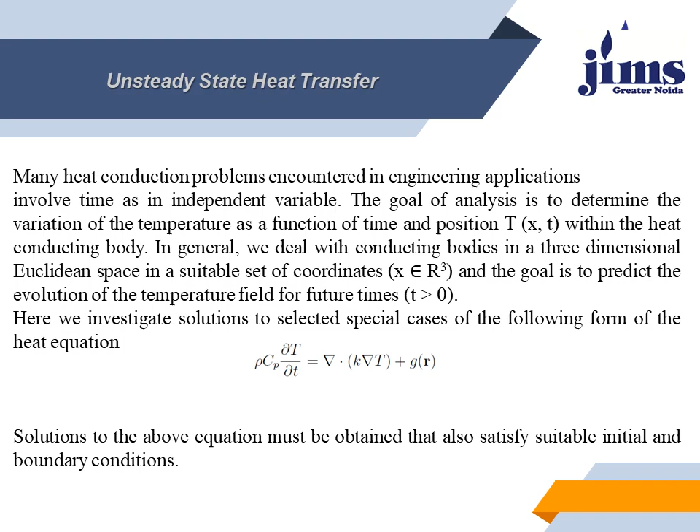Unsteady state heat transfer is generally used in different applications: IC engines, automobile engines, heating and cooling of metallic bodies, cooling and freezing of foods. These are the basic examples of unsteady state heat transfer. In unsteady state heat transfer, temperature varies with time, so time is a very important parameter. On the basis of unsteady state heat transfer we carry out the lumped analysis. So lumped analysis is a part of unsteady state heat transfer.

So what is lumped analysis? If the temperature of the body remains relatively constant with respect to distance, it can be treated as a lumped system, and heat transfer is a function of time only. Mathematically, the temperature is a function of time. So we can use certain dimensionless numbers, such as the Biot number and Fourier number. In lumped system analysis, the typical criterion is that the Biot number is always less than 0.1.

In heat transfer analysis some bodies are observed to behave like a lump, whose interior temperature remains essentially uniform at all times during a heat transfer process. The temperature of such bodies can be taken to be a function of time only, that is T is a function of t. Heat transfer analysis that utilizes this idealization is known as lumped system analysis, which provides great simplification in a certain class of heat transfer problems without much sacrifice of accuracy.

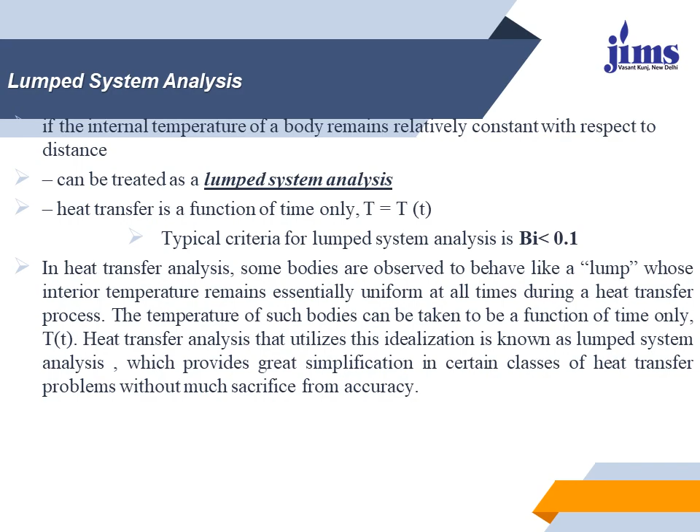In lumped analysis, we assume a copper ball, a plate, or a spherical ball. Consider a small hot copper ball coming out from an oven; measurement indicates that the temperature of the copper ball changes with time continuously, but it does not change much with position at any given time. Thus, the temperature of the ball remains nearly uniform at all times, and we can talk about the temperature of the ball with no reference to a specific location. In lumped analysis, we assume that the surface of the body is maintained at an equilibrium temperature.

All bodies have a finite thermal conductivity, and there will always be a temperature gradient inside the solid whenever heat is added or removed. However, for solids of large thermal conductivity with surface areas that are large in proportion to their volume, like plates and thin metallic wires, the internal conduction resistance, L/kA, can be assumed small or neglected in comparison with the convective heat transfer resistance. Typical examples are heat treatment of metals, or the time response of thermocouples and thermometers.

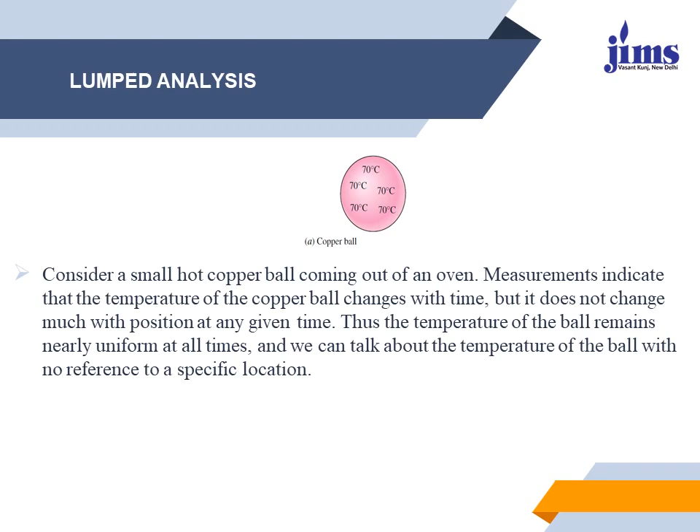Lumped analysis. So consider a body of arbitrary shape of mass m, volume V, surface area As, density rho, and specific heat Cp, initially at a uniform temperature Ti. At time equal to 0, the body is placed into a medium at a temperature which is maintained at T infinite, and heat transfer takes place between the body and its environment with a heat transfer coefficient h. So h is the heat transfer coefficient in case of convection.

For the sake of discussion, we assume the temperature T infinite is always greater than Ti, that is the initial temperature when time t is equal to 0. But the analysis is equally valid for the opposite case. We assume lumped system analysis to be applicable so that the temperature remains uniform within the body at all times and changes with time only. Mathematically, we can say T is a function of time.

During a differential time interval dt, the temperature of the body rises by the differential amount dT. An energy balance equation of the solid for a time interval dt can be expressed as h multiplied by As multiplied by (T infinite minus T) multiplied by dt is equal to m Cp dT, or we can say the transient response of the body can be determined by relating its rate of change of internal energy with convective exchange at the surface.

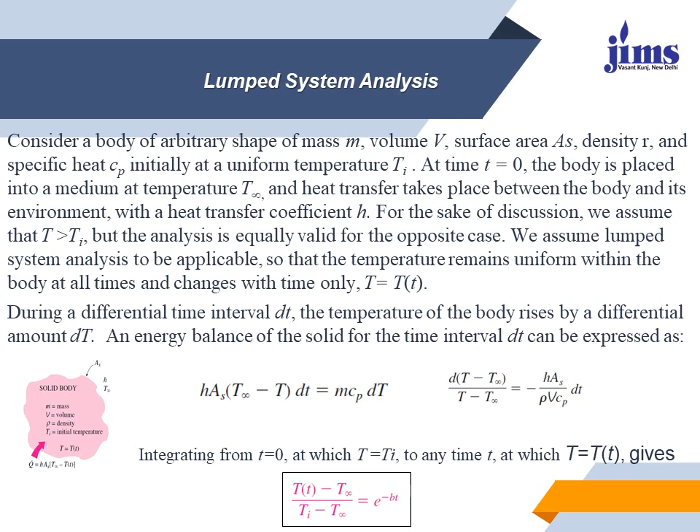This is a mathematical expression for the temperature distribution in case of lumped analysis, where T(t) is the instantaneous temperature at any point, T infinite is the temperature of the surroundings, and Ti is the temperature of the body when time t is equal to 0. So finally, the equation of lumped analysis is (T minus T infinite) divided by (Ti minus T infinite) is equal to e to the power minus Biot number times Fourier number.

The quantity rho V c divided by h As has the dimension of time and it is called the thermal time constant, denoted by tau th. Its value is indicative of the rate of response of a system to a sudden change in its environmental temperature. So from this diagram, the temperature of the body approaches the ambient temperature T infinite exponentially. The temperature of the body changes rapidly at the beginning but rather slowly later on.

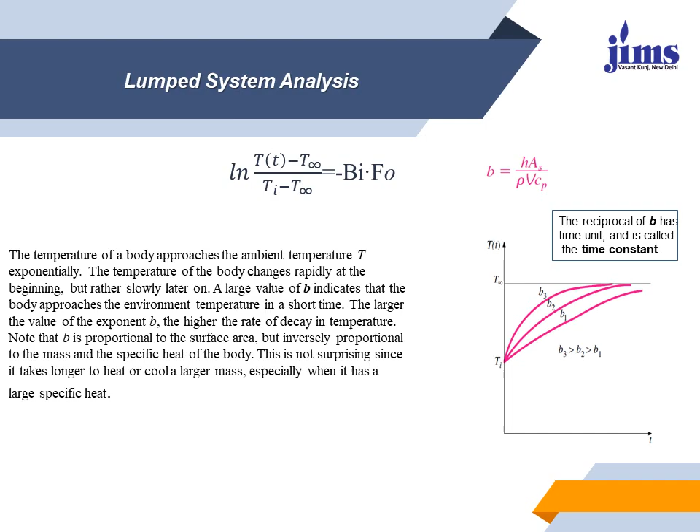A large value of b indicates that the body approaches the environment temperature in a short time; the larger the value of the exponent b, the higher the rate of decay in temperature. It is noted that b is proportional to the surface area but inversely proportional to the mass of the body and the specific heat of the body. This is not surprising since it takes longer to heat or cool a larger mass, specifically when it has a large specific heat. So from this figure it is clear that for a large value of b the temperature approaches T infinite exponentially.

So the Heisler chart. The Heisler chart is also very important in case of transient analysis. The solutions obtained for one-dimensional non-homogeneous problems with Neumann boundary conditions in the Cartesian coordinate system using the method of separation of variables have been collected and assembled in the form of transient temperature charts by Heisler. The given charts are a very useful baseline against which to validate one's own analytical or numerical computations.

Therefore, the Heisler chart provides the temperature history of the solid at its mid-plane, and the temperatures at other locations are worked out by multiplying the mid-plane temperature by correcting factors read from the charts. The values of Biot number, Bi, and Fourier number, Fo, used in the Heisler chart are evaluated on the basis of a characteristic parameter, which is the semi-thickness in case of a plate and the surface radius in case of cylinder and sphere. So this is a very important parameter.

When both conduction and convection resistance are almost of equal importance, the Heisler charts are extensively used to determine the temperature variation. So we can say that the Heisler chart is generally used to determine the temperature variation when the conduction resistance and the convection resistance are equally important in case of heat flow.

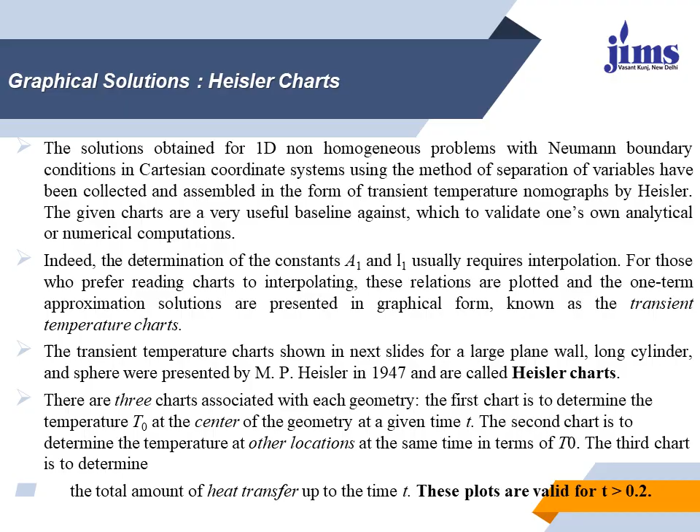These plots are valid when the Fourier number is always greater than 0.2. So the Heisler chart is very important to calculate the temperature distribution when the conduction and convection resistances are both equal. The determination of the constants, that is A1 and λ1, usually requires interpolation. For those who prefer reading charts to interpolating, these relations are plotted and the one-term approximation solutions are presented in graphical form known as transient temperature charts.

Heat transfer through a fin. It is also a very important topic. So what is the meaning of heat transfer through a fin? Let us start. Whenever the available surface is found inadequate to transfer the required quantity of heat with the available temperature drop and convection heat transfer coefficient, extended surfaces or fins are generally used. This practice is found necessary in heat transfer between a surface and a gas, as the convective heat transfer coefficient is rather low in these situations. Fin surfaces are used in different applications.

Convective heat transfer between a solid surface and the surrounding colder fluid is governed by Newton's law of cooling, which states that the rate of convection heat transfer is directly proportional to the temperature difference between the hot surface and the surrounding fluid and also directly proportional to the area of contact exposed between them. So Newton's law of cooling can be expressed as Q convection = hA ΔT, where h is the heat transfer coefficient, A is the surface area, and ΔT is the temperature drop.

So the convective heat transfer can be increased in the following ways. Number one, increasing the temperature difference between the surface and the fluid; increasing the convective heat transfer coefficient by enhancing the fluid flow or the velocity over the bodies; and the last one is increasing the area of contact exposed between the surface and the fluid. So heat transfer rate can be increased drastically by using fins.

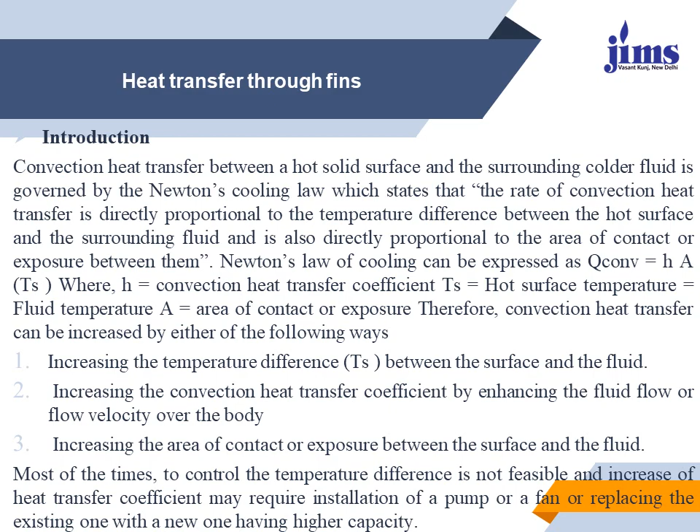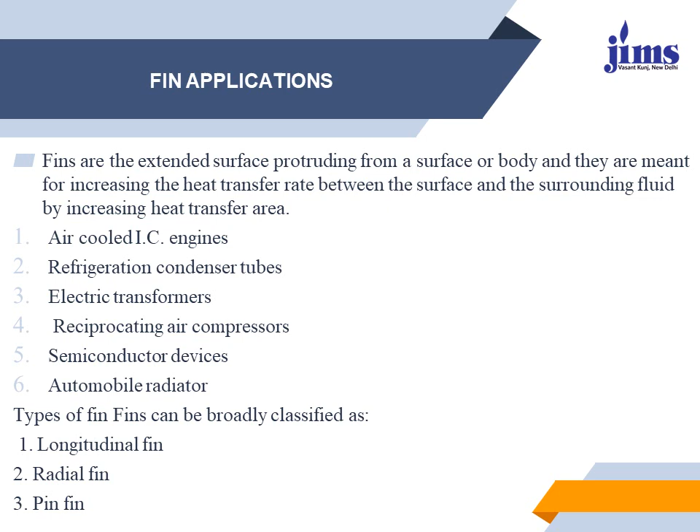There are different types of fins we can use. The first one is the longitudinal fin, the second one is the radial fin, and the third one is the pin fin. In most applications, longitudinal fins are used, in IC engines, in 2-stroke petrol engines, or in 4-stroke petrol engines. Different types of fin. Fins can be classified on the basis of the surface structure. In this case we can classify the fin on the basis of its surface area into nine types: A, B, C, D, E, F, G, H, I.